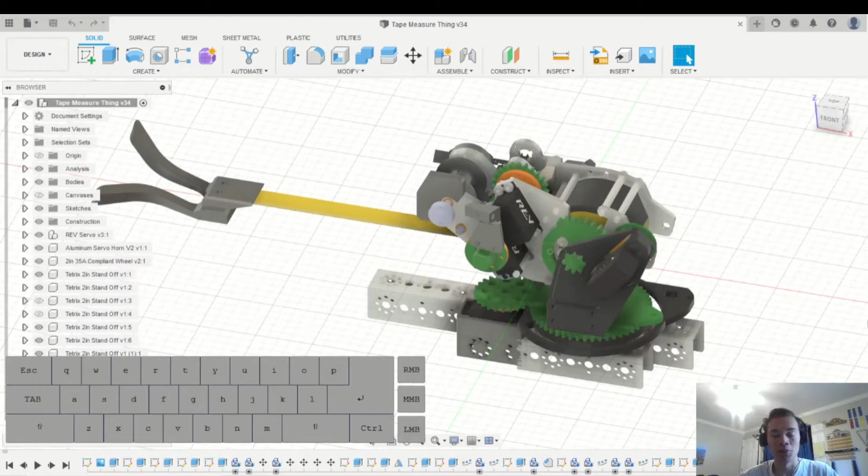And I want to make these videos to teach others how to use CAD, especially other FIRST teams, so they can learn how to design their own robots and their own 3D printed parts. But hopefully after anyone watches these videos, they'll be able to design anything they want, such as this cool tape measure machine that we designed for our past season's Freight Frenzy robot.

So in this series, we'll cover many different things, such as how to create strong and reliable 3D printed parts, how to create optimal CAD designs, how to use the 3D printer, how to repair and modify a 3D printer, learn how to post-process 3D prints, and about different kinds of 3D printing filament.

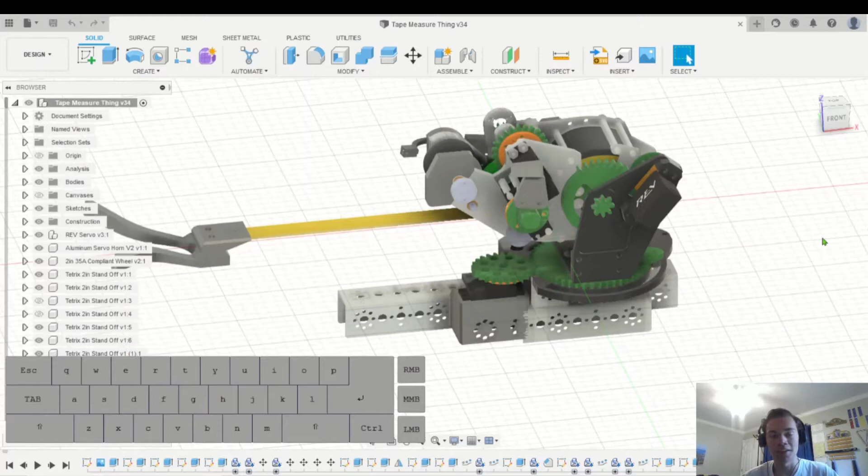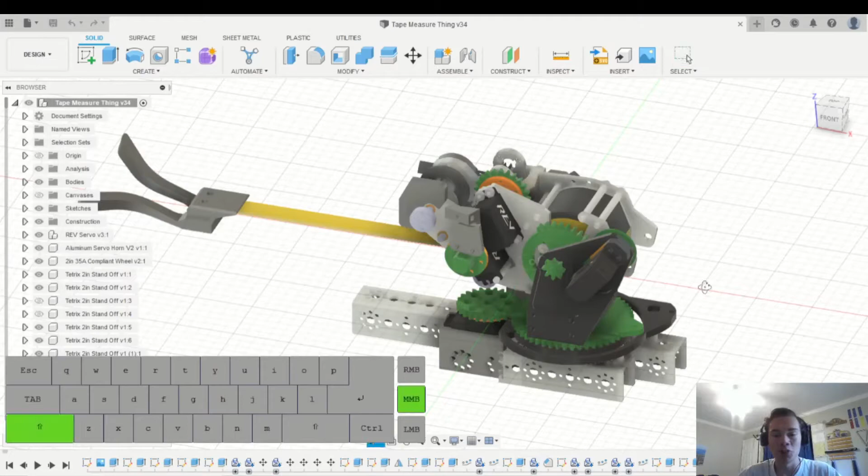So the first thing we should cover is why our team chose to use Autodesk Fusion 360. The first reason is mainly because you can get it for free as long as you're a student. You can just Google download Autodesk Fusion 360 for free, and all you have to do is upload a picture of a school transcript or any school document so that they can verify you're a student, and you can get it for free super easily.

Next, it lets you collaborate in teams, so it's really easy to share your robot design with other team members. And it also doesn't require an incredibly powerful computer to run, so anybody can run it, which is great. But before we start designing anything in Fusion 360, we first need to know the basics of how it works.

So Fusion uses designs that are based on components that you can see over here. A component serves as a part that is capable of motion, has its own unique origin, can also serve as a container for a variety of design objects, including bodies, sketches, construction planes, which we'll go over later, and other components. It's also a sketch-based program, meaning that 2D sketches can be brought into the third dimension using a variety of tools such as Extrude or Loft or Revolve.

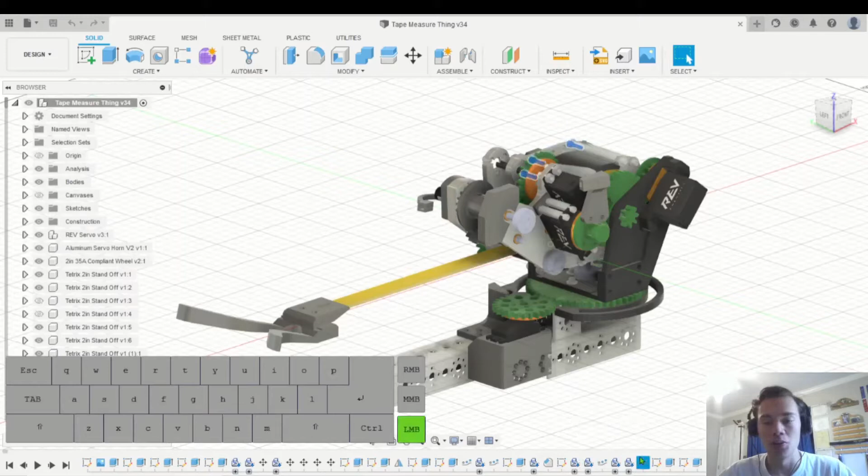And lastly, it utilizes a parametric workflow that you can see down here in the timeline, which means every feature that you do is based off features that come before it. So instead of changing the whole design, I can just scroll back in the timeline and change the very first thing, and it'll update the rest of the design, which is super convenient.

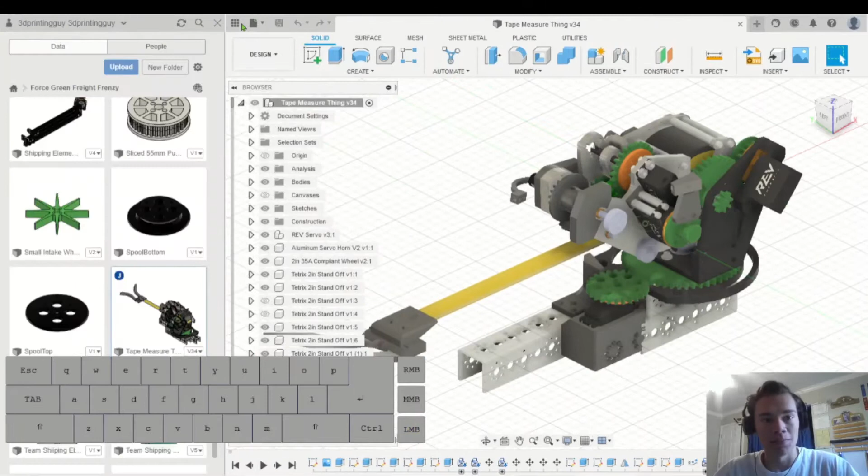So just so everyone's on the same page, we'll go over all the features in Fusion and what they're called. So first over here is the data panel, which you access by clicking this button, and this is where all your designs and projects are stored. Here's your design window, and this is where you'll see your designs. Up here you have all the tools, as well as these menus up here that let you access other kinds of tools. Over here is the browser, and down here is the timeline.

The browser is what stores all your components, construction planes, bodies, canvases, sketches, and down here in the timeline is where all your features are stored, such as sketches, extrudes, mirrors, chamfers. Anything that you do to the model will be recorded down here.

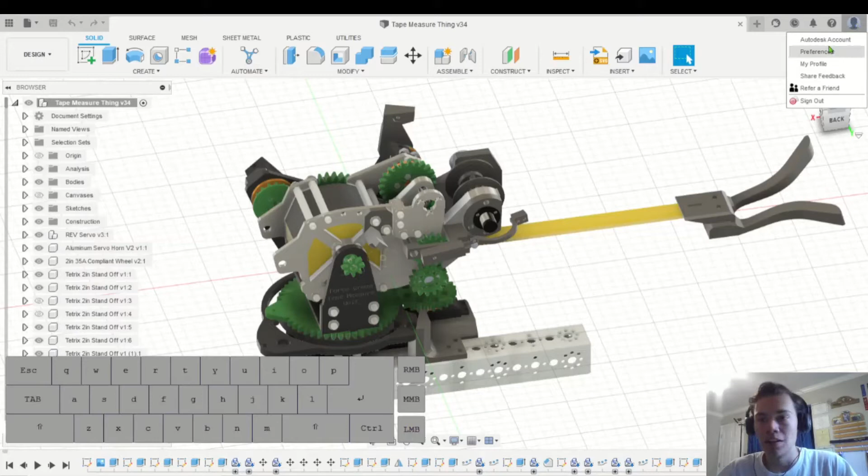And before we start modeling, real quick, we should change some default settings, so I just find it easier to use. You go up here to the very top right and click Preferences. This opens a menu where you can change any settings that you would want.

So first thing, the default modeling orientation should be set to Z up. If you try to design anything that you're going to 3D print and import that into 3D printing software and have it set to Y up, everything comes out sideways. It is not ideal, so I like to keep it on Z up.

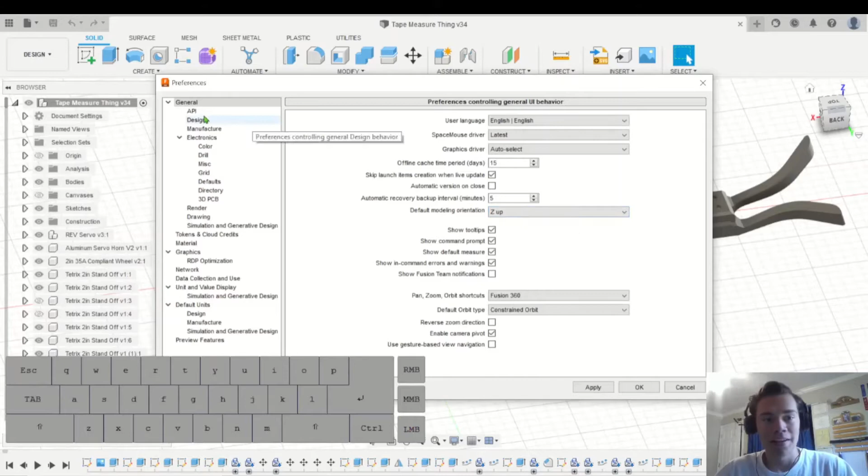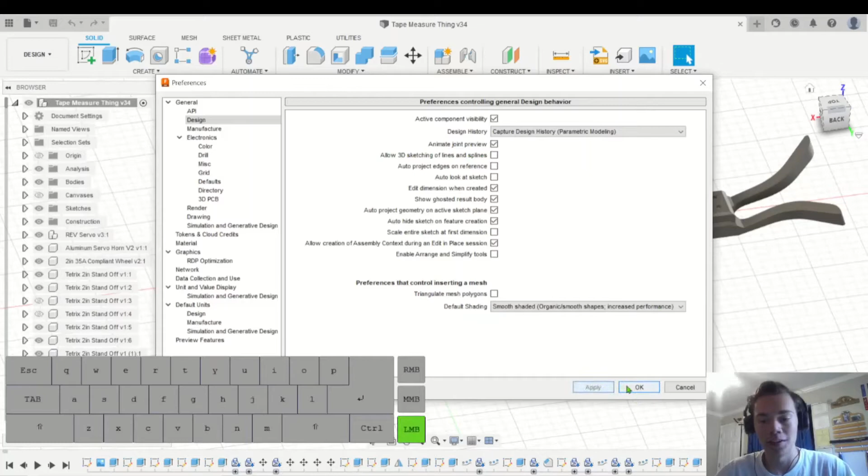And under design, I've unchecked the allow 3D sketching of lines and splines. So sometimes that can be useful, and I will have to go back in and recheck that box. But often it just gets in the way, and when I'm trying to make a 2D sketch, it gets all wonky and I'll be in the third dimension without wanting to. I think it's just cleaner having that off by default. So I'll hit apply and OK. And now we're ready to start modeling.

Real quick before we start designing, I just wanted to go over how to move around in Fusion. And don't mind that I'm wearing an orange shirt. I just added this clip in as an afterthought because I thought it was important.

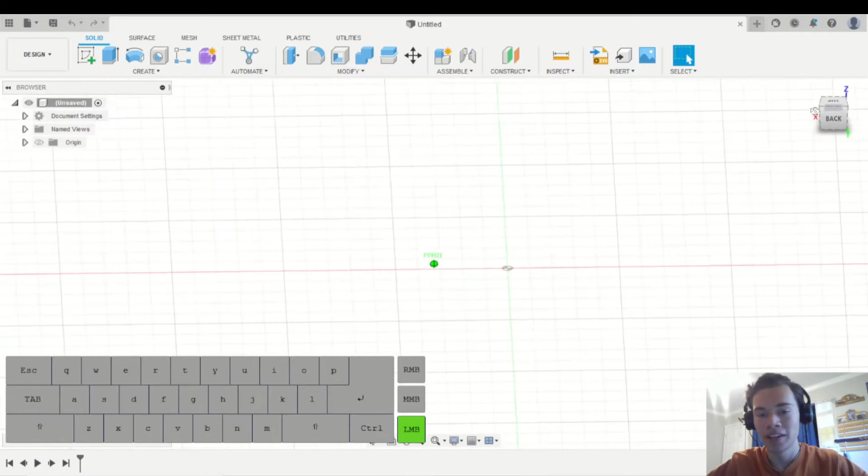So to orbit like this, all you have to do is hold Shift and the middle mouse button and move your mouse around. And to pan from side to side, just hold down the middle mouse. And to zoom, just use the scroll wheel. So it's pretty easy. Or if you don't have a mouse, which I do recommend, you could just use the view cube up here and left click on that, and you can rotate it around just like this.

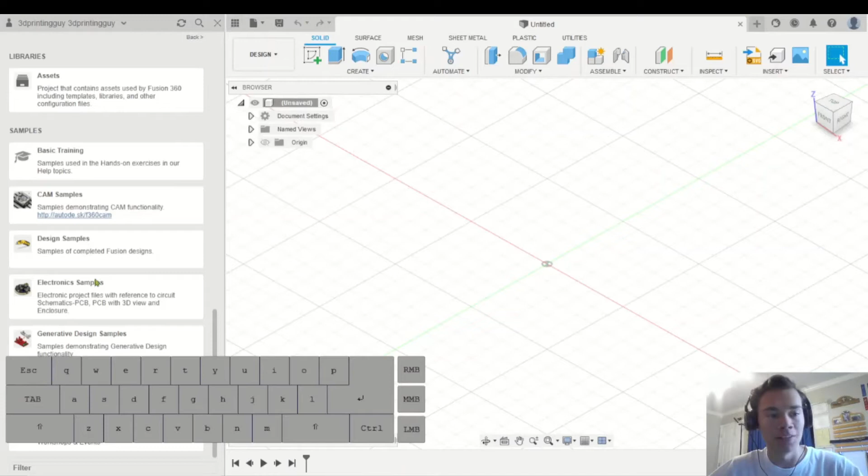So next we'll just go over how to create some basic designs. It'll just be made of cubes, rectangular prisms, cones, things like that, just to get a grasp of how the program works. So when you first open it and open your data panel, you'll probably see something like this. What we want to do first is create a new project. Now I already have a bunch of them for various things I've been working on, but if you don't have one already, just hit new project. I'll call this tutorial.

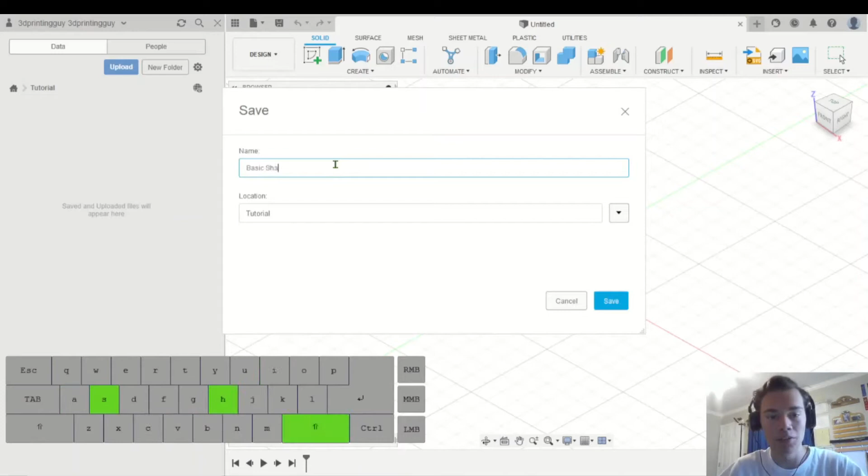And then once that's created, you open it up and now you can start designing. So you'll see in your design window, this is called Untitled. The first thing you should do, even before you start building whatever you're making, is make sure you save it. And this way you can give it a title, and it'll also allow you to import other components, which we don't need to do right now, but that's something you'd have to do if, say, you were creating a design for your robot. So if we wanted to make a cube, there are already features that are built in for that, but that doesn't teach you a lot about how to do it, so I'm going to walk you through the basics. So this is how you create any shape, really.

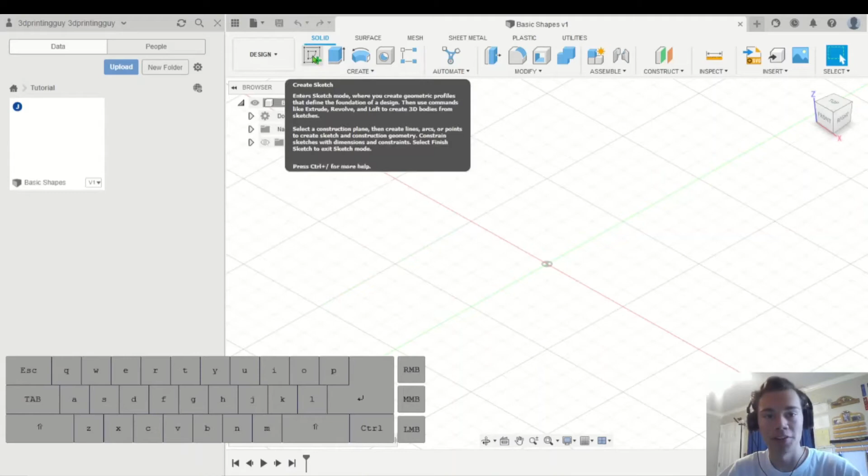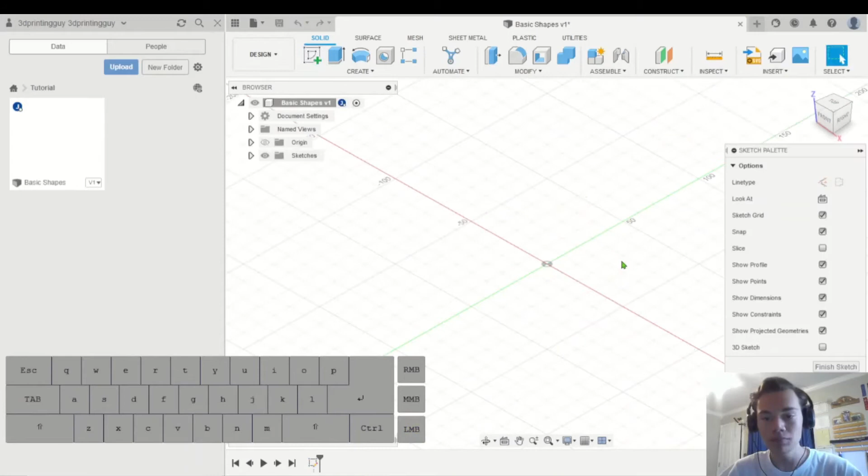The first thing you need to do is create a sketch, which is up in the top left by this green plus sign. And next it's going to ask you to select a plane that you want to put your sketch on. So again, the sketches are 2D, and you bring them into the third dimension. So I'll draw the bottom face of my cube. So I'll select this bottom plane right here. And a cube is really just a 3D square. So what I need to do is draw a square.

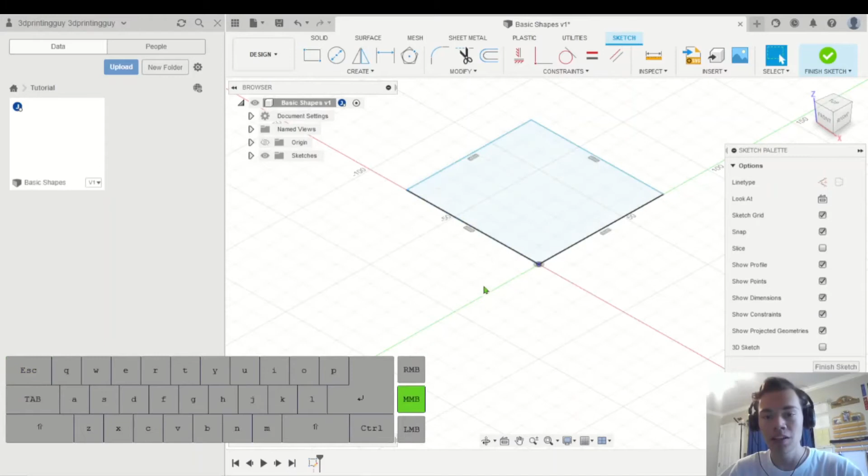So I can do that by hitting R for rectangle, and it will ask me where I want to put the first corner of my rectangle. And I'll just select this circle right here, which is the origin of the design. And I'll click once, and now I can move my mouse to wherever I want to put the other corner. So I'll just click right about here, and now I have a square. Or it's roughly a square. If I want to add dimensions, I can hit D and select one of the lines. So I'll make this one 80 millimeters, and then I'll make this one 80 millimeters.

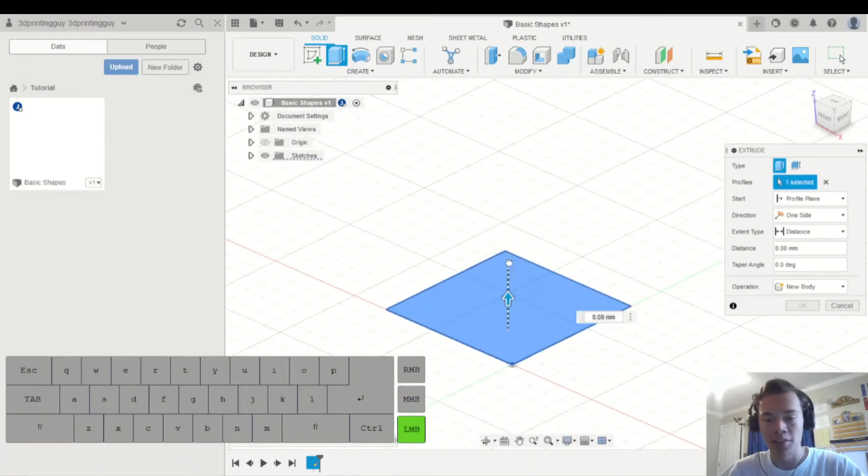Now to bring the square into a cube, I'll hit E for extrude, and it'll automatically select the square since that was the only enclosed region in my sketch. Now I can just drag this arrow, and I'll set that to 80 millimeters and hit OK. And now I have this cube.

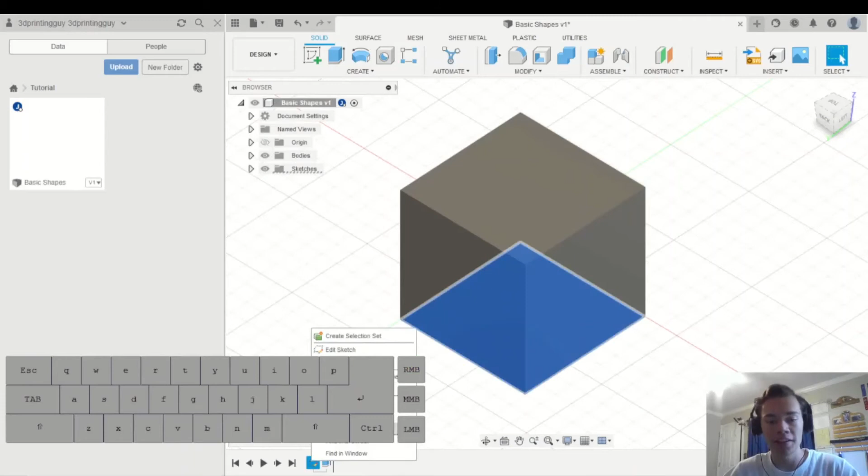Now if I realize that the dimensions of the cube were wrong, it's super easy to go back and edit it. All I have to do is go back in the timeline, see this first sketch icon. I can right click that and hit edit sketch. Now I can change the dimensions to the updated design and just hit finish sketch, and it'll automatically update it for me.

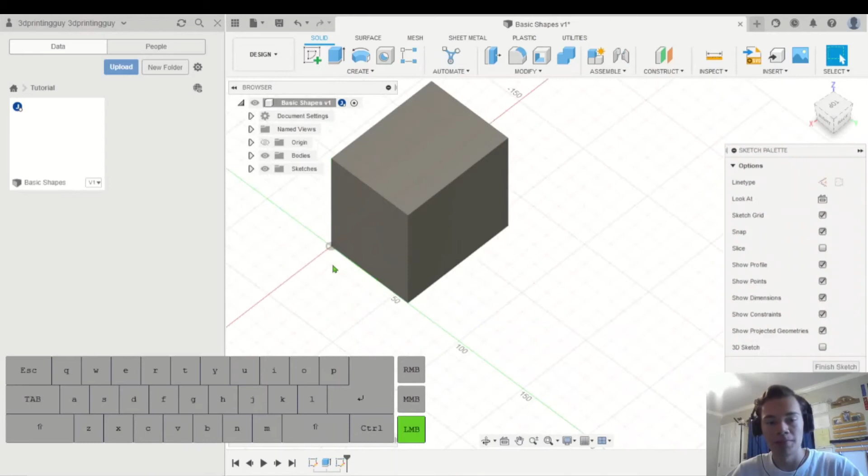And this process works very similarly for a variety of other shapes such as cylinders. So again, I'll hit create sketch, and I want to draw the bottom face of my cylinder, so I'll select the bottom face. And this time I'll hit C for circle, and I'll select the center point, just about here looks good. And then I can type in the dimensions of my circle, hit enter,

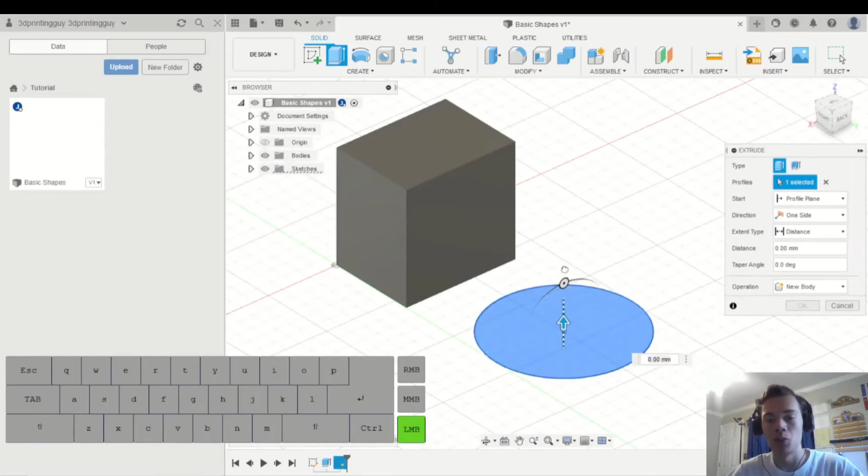and now I can extrude it by hitting E. And I can just drag it to whatever height I want and hit OK.

Alright, so I'm back with the orange shirt on, and now I'm going to teach you how to make a cone. So this process is a little different because it's not a consistent width the whole way up. You know, it starts wide at the base and narrows at the top, so we can't just use a normal extrude. So we could use a loft or a revolve, but I think a revolve would be better for this.

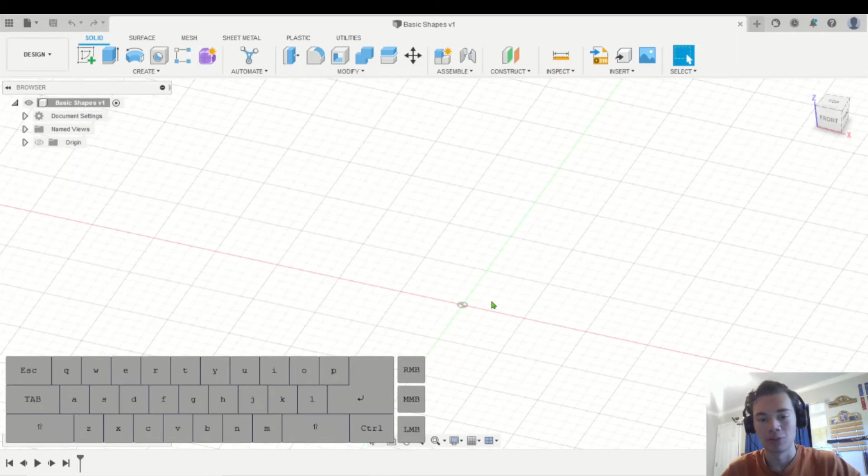So I'm going to create a sketch, and this time I'm going to create it on the side. And we're going to draw half the cross section of a cone. And if you imagine a cone from the side, it looks like an isosceles triangle, and we just need to draw half of that. So we're going to draw a right triangle just like this.

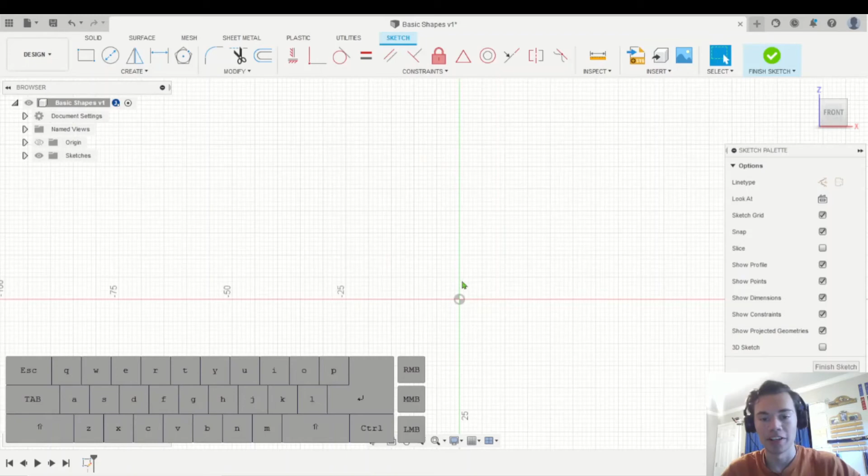And to do that, we're going to hit L for line, and I'll select the origin, and now I can move the end of the line wherever I want it. I'm going to make sure that it's vertical, and you can see here that blue symbol next to the line shows that the line is vertical and it's locked in place.

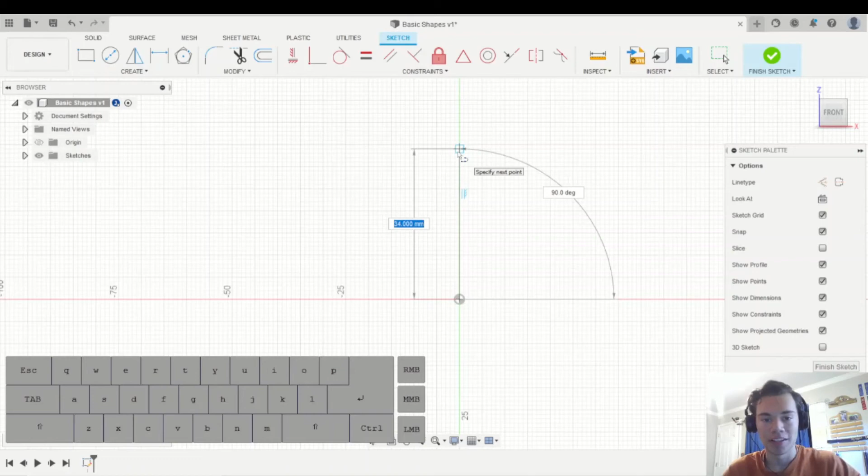So I'm going to set this as 30 millimeters, hit enter, and for my next line, for the base, I'm going to again hit L and click the origin, and I'll make this one 15 millimeters. So I'll hit enter. And you can see that these lines are black because they're locked in place, and I can't move them if I try to.

You see this one is locked here vertical by this symbol, and they're also locked perpendicular by this symbol. If I just put a random line out here, that's blue because it's not anchored to anything. I can move it around. So when you're doing your sketches, it's important to make sure that everything's black and locked in place.

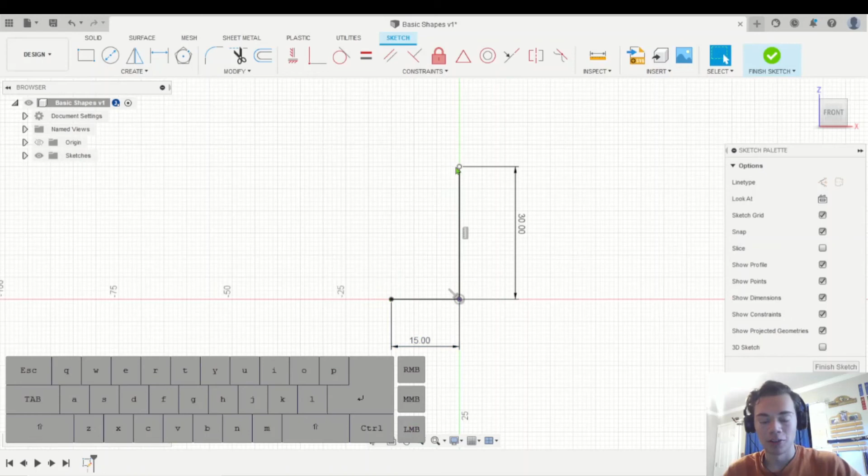Because like I did with the cube, if I try to go back and change something, it could mess something up and everything will come out wonky. So you gotta make sure all your dimensions are in and everything is nice and locked down. So for the last line of the triangle, I'm just gonna click the endpoints of each of the lines. And there we go. So now it shades the triangle in blue because it's an enclosed region.

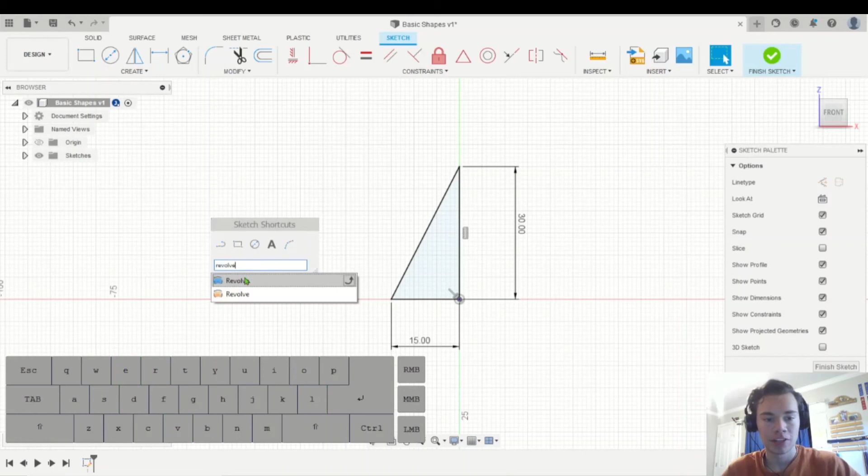And now to access the Revolve tool, I can just use the keyboard shortcut S for search, and I'll just type in Revolve. So I'll click on that, the blue one, because it's a solid. And once that menu opens up, it will select the triangle. And for axis, we want the center. So I'll select this line, and then that will automatically generate a cone.

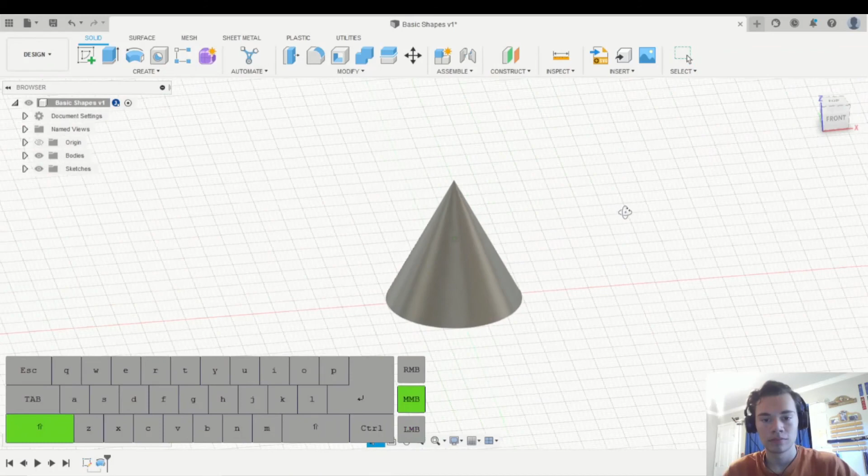And now once I have just one shape, I'm no longer limited to just drawing sketches on these orange planes right here. I can draw sketches on the faces of these shapes, and now the possibilities are really endless.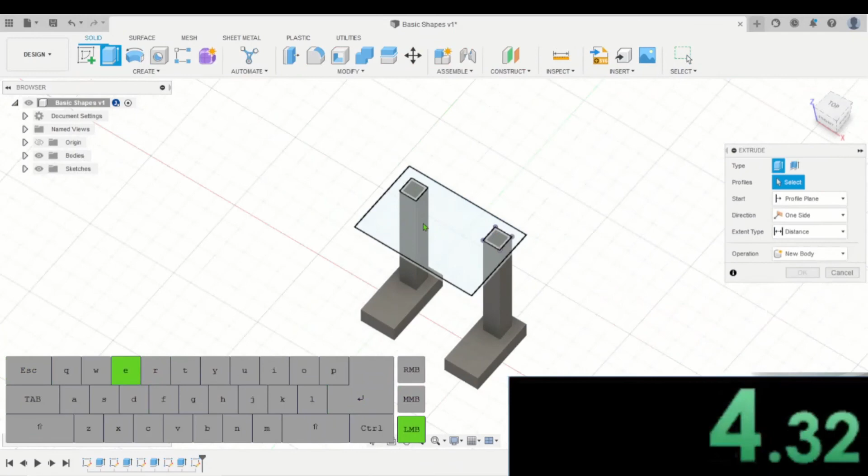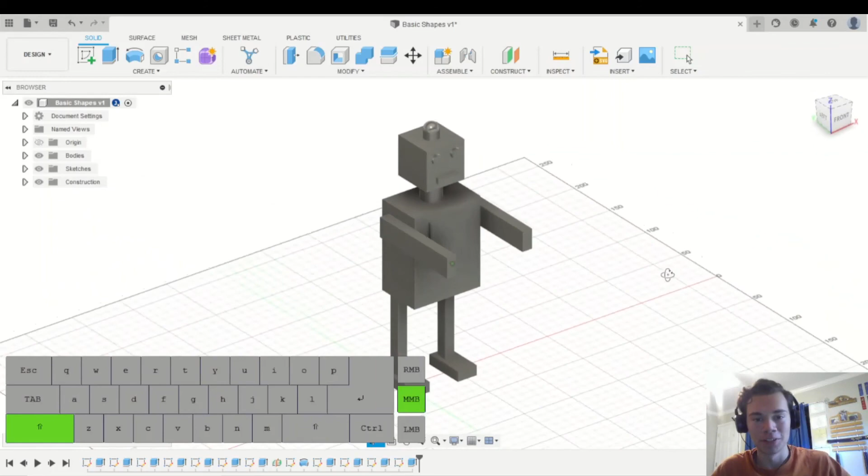There we go. Now we've got ourselves a robot that we just modeled using rectangles, circles, and the Extrude and Revolve tool. So hopefully you guys enjoyed. And obviously this was the very, very basics. And slowly we'll start building up our skills and doing some more and more advanced stuff. So we'll be able to create some pretty cool